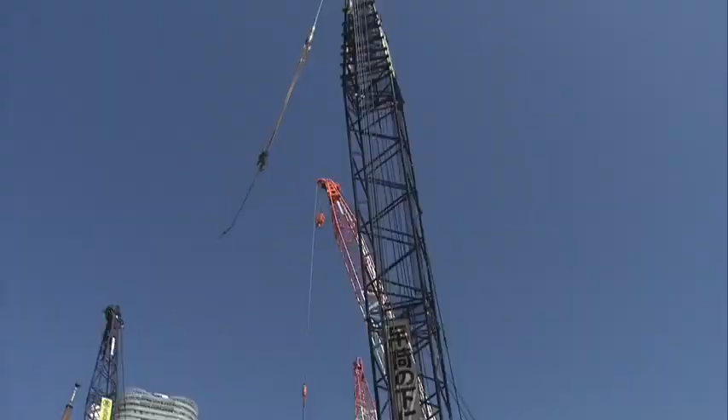In 2020, the Olympic and Paralympic Games will be held in Japan's capital, Tokyo. Ahead of the Olympics, major urban restructuring is underway. It aims to reinforce aging infrastructure built from the latter half of the 1950s, during Japan's period of rapid economic growth, and to enhance Tokyo's new role as an international city.

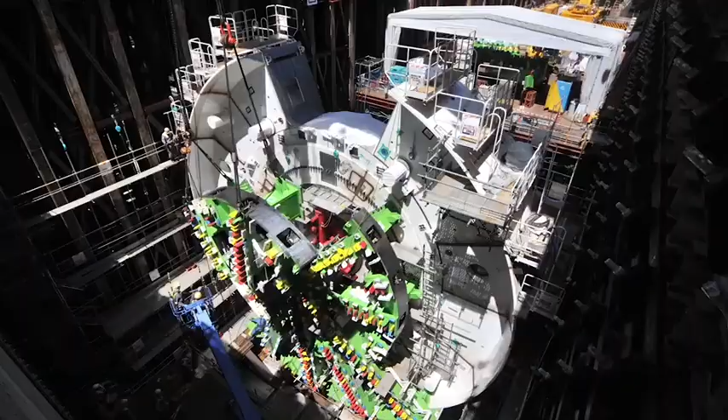This large-scale infrastructure construction work is being sustained by state-of-the-art artificial intelligence and information technology. In this program, we are at the front lines with major Japanese construction company SHIMIZU Corporation as it endeavors to redevelop Tokyo. Explore with us cutting-edge technology in the fields of construction and public works.

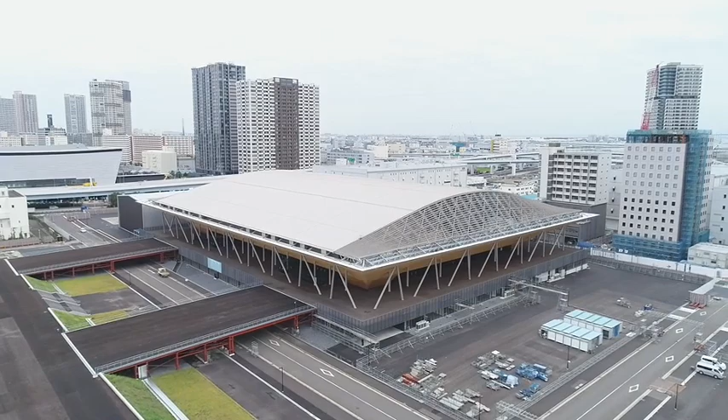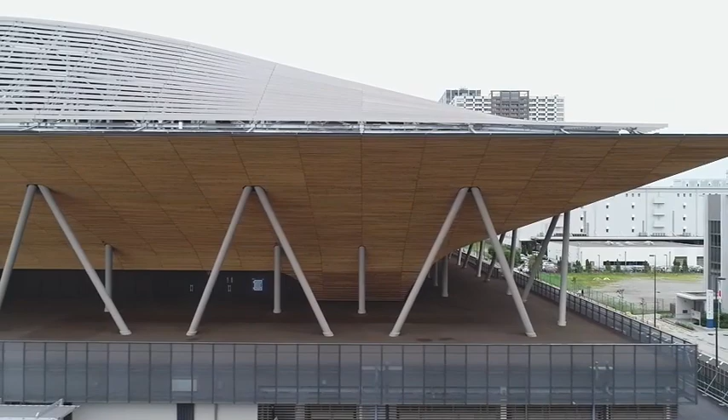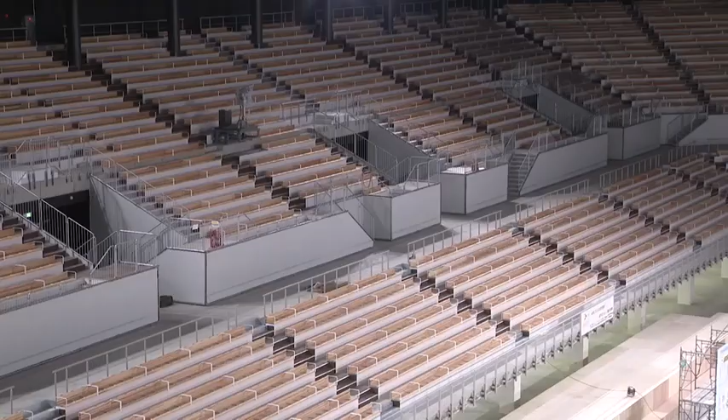Newly constructed on Tokyo Bay for the Tokyo Olympics and Paralympics is the Ariake Gymnastics Center. With a length of 140 meters, a width of 120 meters, and a height of 30 meters, this building will hold 12,000 spectators. It will be the venue for Olympic gymnastics, rhythmic gymnastics, and trampolining, and for Paralympic boccia. After the Games, the seats will be removed to use the center as an exhibition hall.

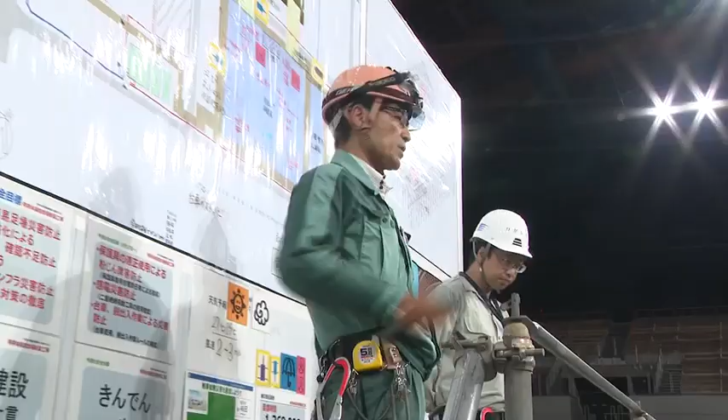Hi, おはようございます。9月19日木曜日、朝礼を行います。 This is Masamichi Nagata, the construction manager of the Ariake Gymnastics Center. Soon, he will have to hand over the building. There is just over a month until its completion. Work has entered the final stages. Nagata carefully checks on the progress being made. He makes a point of speaking directly with the workers.

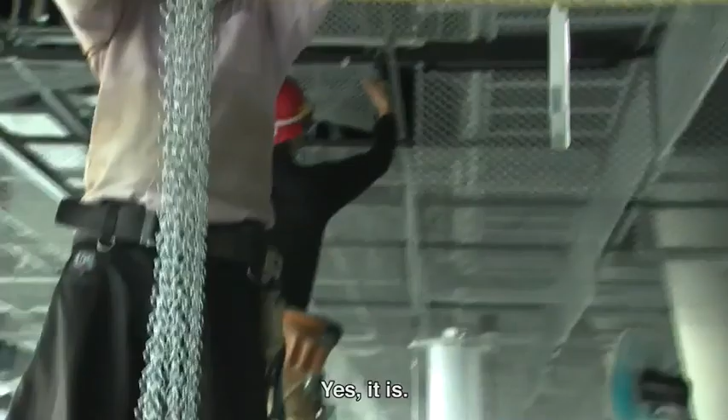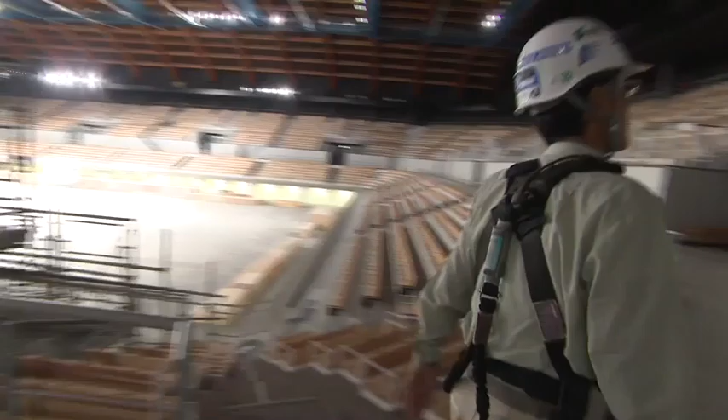The biggest feature of the building is the abundant use of wood for the roof and the seats, evoking a sense of tranquility and healing, and creating an image of the venue as a vessel of wood. Wood is also used in the outer walls that jut out diagonally, above the passageways that encircle the venue. Wood scraps are even used in the passageway paving. The aim is to make the athletes and spectators visiting from around the world feel comfortable.

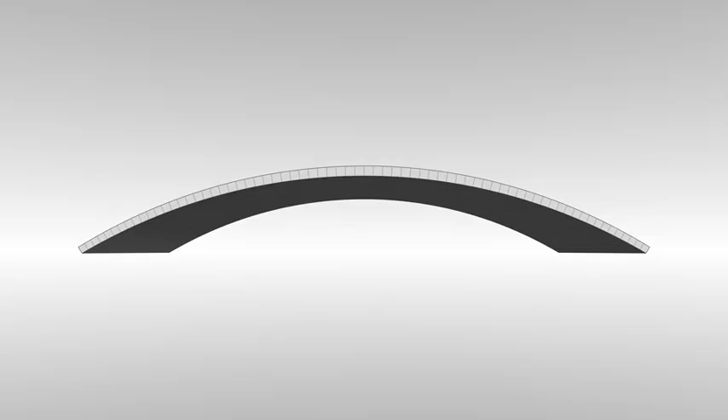The greatest challenge for SHIMIZU Corporation has been how to construct the arch-shaped timber beams that support the roof. Although these beams are 90 meters long, they aren't made of steel usually used for long-span structures. They had to work out how to attach it. With an arch shape, its weight pushes it outward, making it unstable. And in this case, the span is a colossal 90 meters.

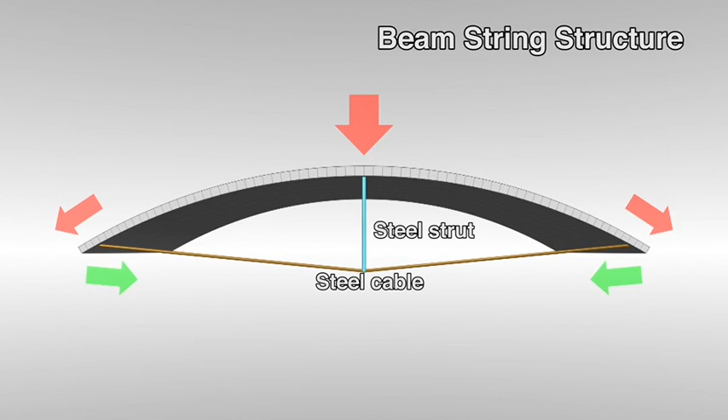SHIMIZU decided to adopt a beam string structure. Steel cables were drawn beneath the timber beams, and steel struts were placed between the beams and the cables. In this way, like the mechanism of a bow and arrow, the steel struts cause the arch to push upward. This balances the force of the beams, struts, and cables, which creates stability.

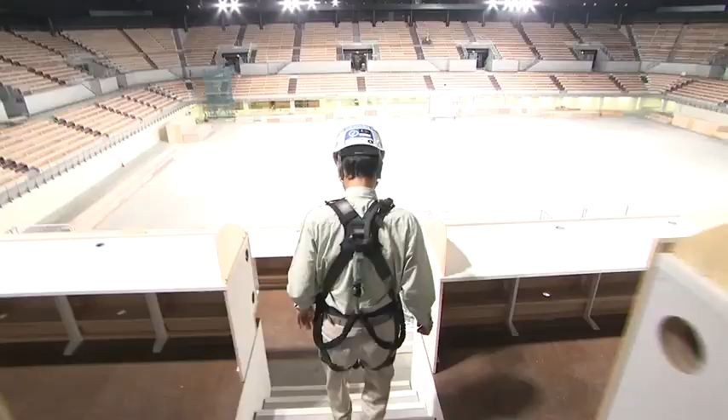How to construct a space as big as this that's supported by timber, something that is rarely seen worldwide, and how to do that in a construction period of just 2 years. With a scale like this, it generally takes 2.5 years. To get it done in 2 years requires quite a bit of ingenuity. We considered many methods.

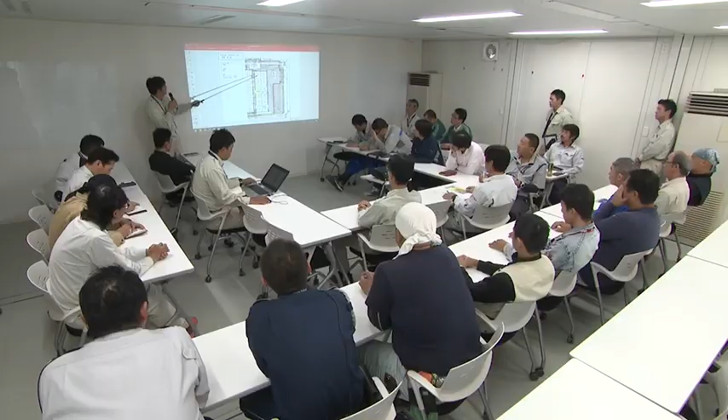Nagata has experience building baseball stadiums and exhibition halls, so he had no hesitation working on a large building. But based on his experience, it would take 2.5 years. When SHIMIZU accepted the job, there were only 2 years left. He would have to cut construction time by 6 months. He fundamentally re-evaluated the construction process.

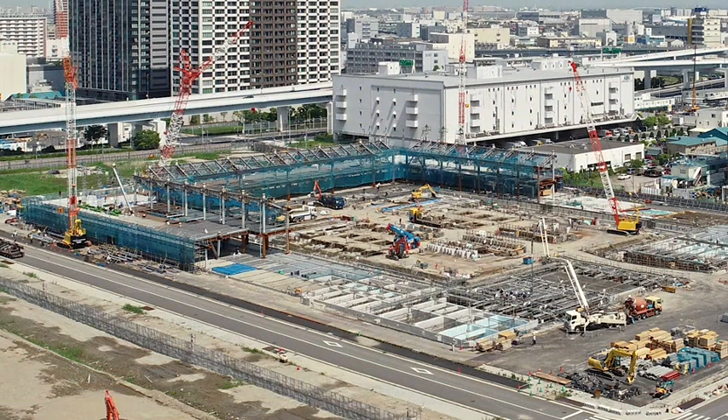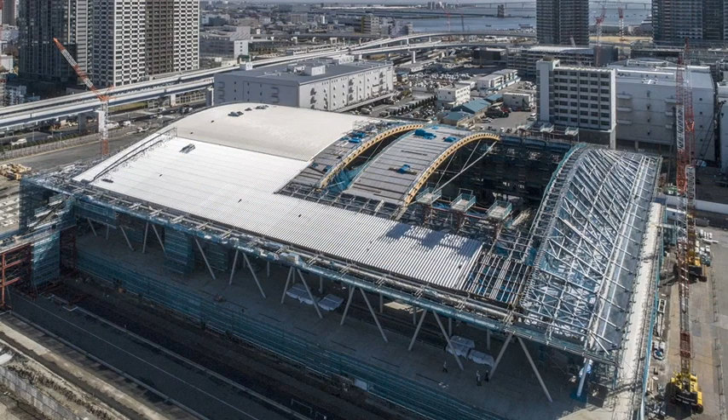Usually, buildings are constructed from the bottom up. But here, after first completing the floor, they decided to build from the side. If the stadium were cut vertically, you would see a similar structure repeated. Based on that, they decided to start work from the rear and gradually move forward.

With such a big space, if we set up scaffolding for all of it, it would be a huge amount. By building from the back, we can move the scaffolding and the workers can complete one cycle. Because that cycle is repeated, efficiency steadily increased, and in the end, work was done almost twice as fast. We were able to do it in half the number of days.

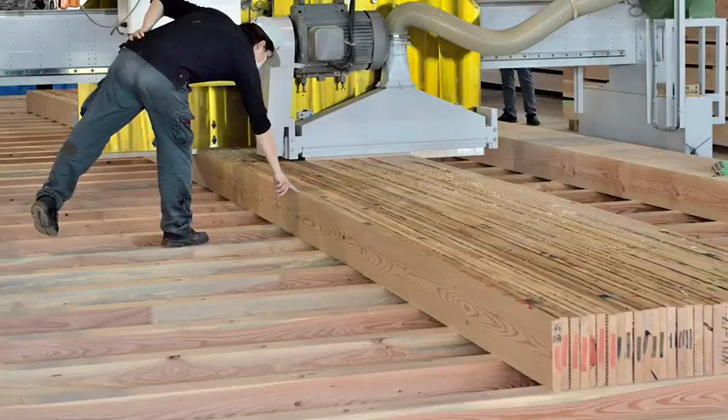The beams are factory-made, using domestic larch trees, and are brought to the site where they are put together. By proceeding in order from the rear, the roof could be separated into 5 units and attached in order.

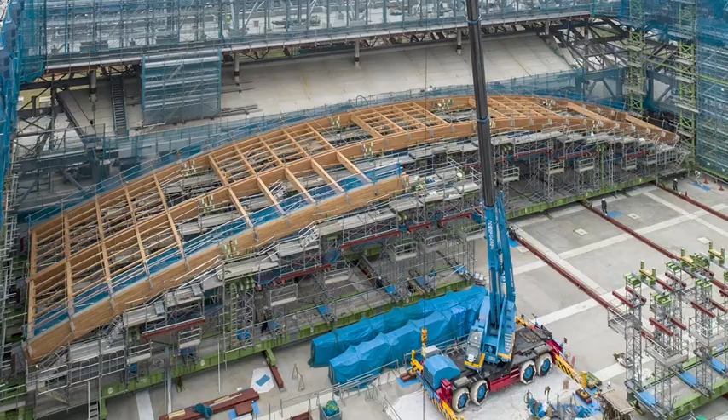We placed the frame for the unit on the ground floor playing area first, and then we assembled the roof unit on that frame using a crane. This procedure took a lot of time at first, double the amount of time I had estimated. Assembly of the roof units. How to reduce the amount of time needed to do this subsequently became an issue.

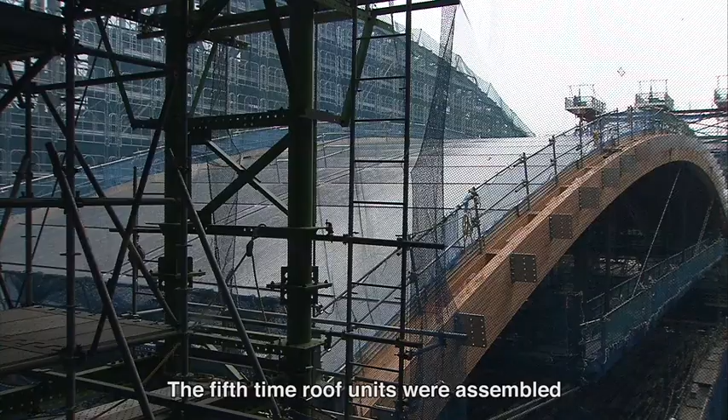Each roof unit is 70 meters long, 14 meters wide, and weighs 200 tons. The floor is already complete. Consequently, a heavy, large-size crane cannot be brought in. So, they use hydraulic jacks to lift them to a height of 30 meters. Slowly, carefully, they raise them.

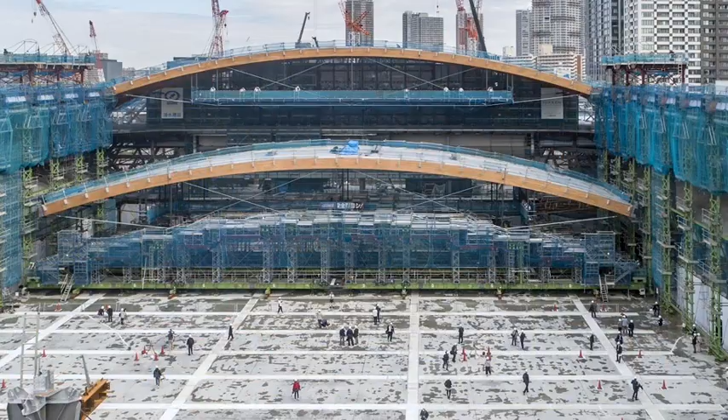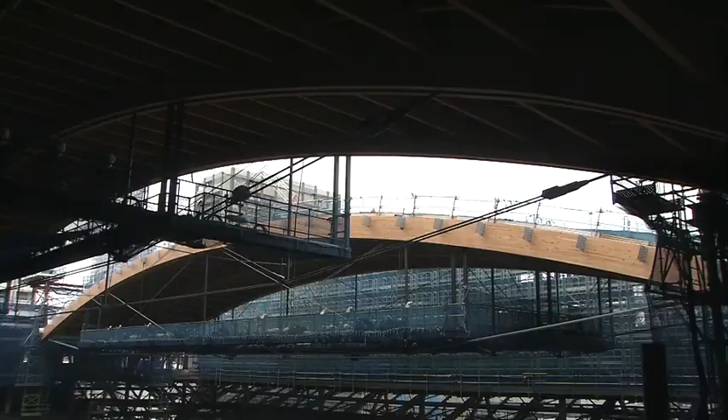Because the raising of the roof was divided into 5 lifts, lessons learned from the first lift were applied to the second lift, and then applied again from the second to the third, and so on, which rapidly increased the speed of the work. In the end, it took 1 month to assemble at ground level. The workers' experience also made a big difference to the lifting process, which we completed in half a day.

At first, they worried that processing accuracy with timber would not be as good as with steel. The accuracy with the timber was amazingly good. There was not even a deviation of 1 or 2 millimeters. The total length of this beam string can be adjusted by pulling the cable. In order to fit the beam between the frames on each side, the overall length must be adjusted.

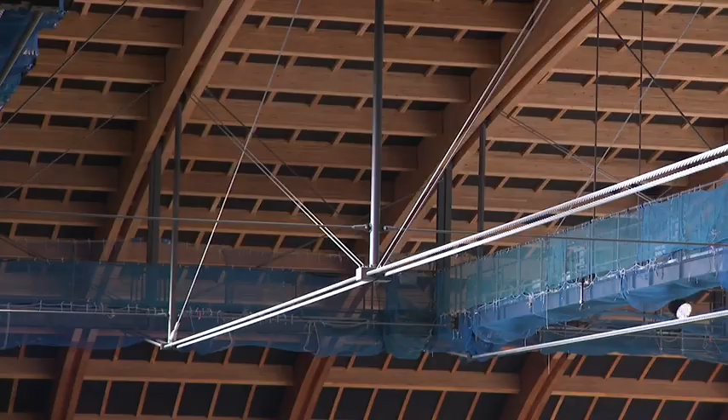But by adopting the beam string structure, we could construct the roof accurately with timber. Really, as calculated, we proceeded with the timber without any measurement error, and conversely, I thought that it is a more precise structure. The stadium is filled with the knowledge and ingenuity of all concerned. This wooden masterpiece will be ready for its Olympic performance in July this year.

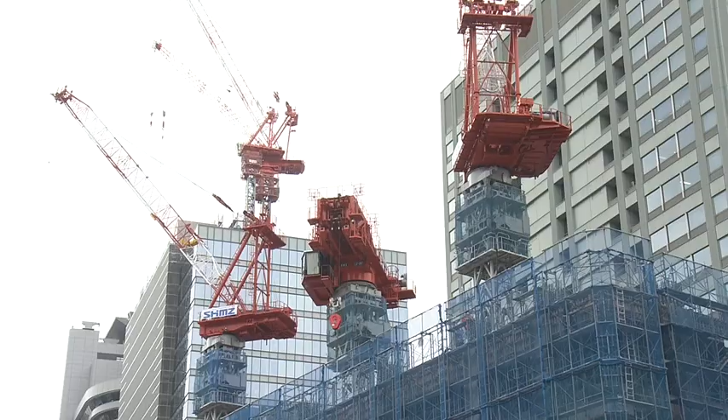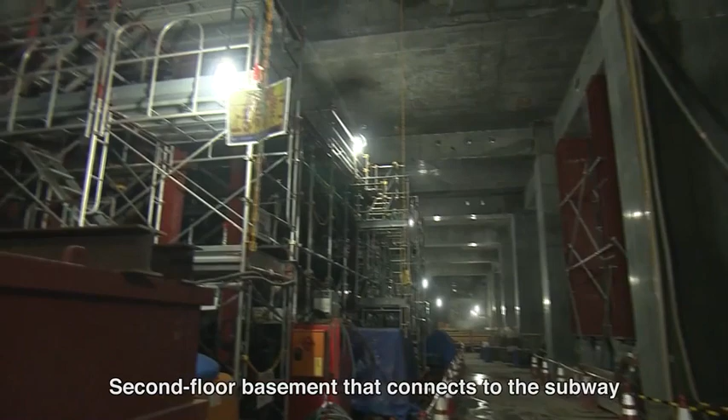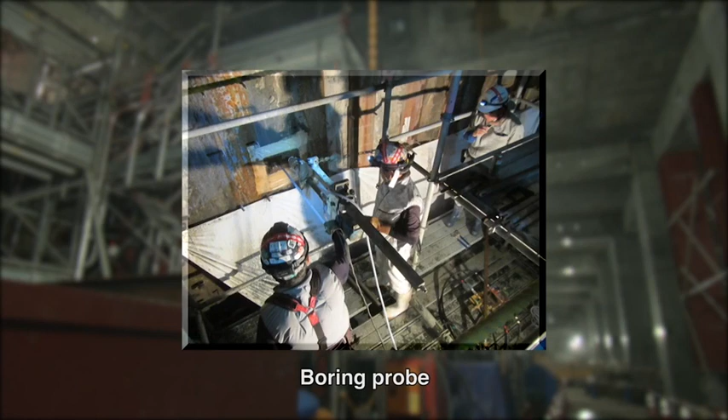Urban redevelopment is happening all over Tokyo. Huge skyscrapers and other structures are being built where old buildings and houses used to be. This is the construction site of a 40-floor skyscraper with 2 basement floors. The framework of the 5th floor section is currently being built. In the city center, built more than a century ago, the subway has been used for many things, and there is a possibility that unrecorded buried objects have been left behind. Consequently, an advanced geological survey was carried out via boring to check whether any impediments to construction might occur.

There were also other issues with this site. This is a large-scale building, and compared with the site, there is almost no spare space. In these cases, the most difficult part is bringing in materials and putting the building together. Since there is no place to put the materials, we are renting land at a different location and temporarily assembling it there, bringing it to the site, and installing it. I think this site is unique to the city center.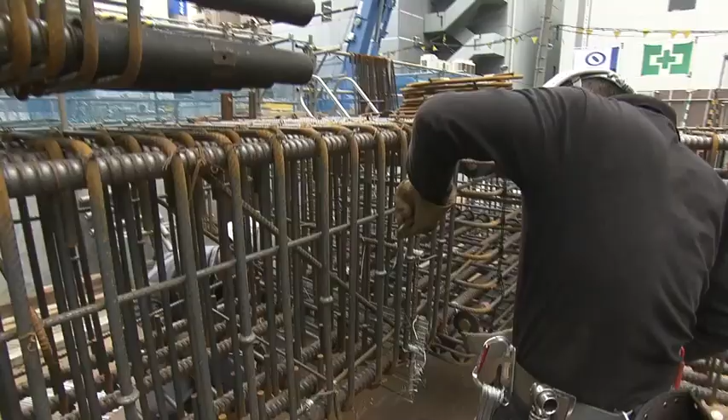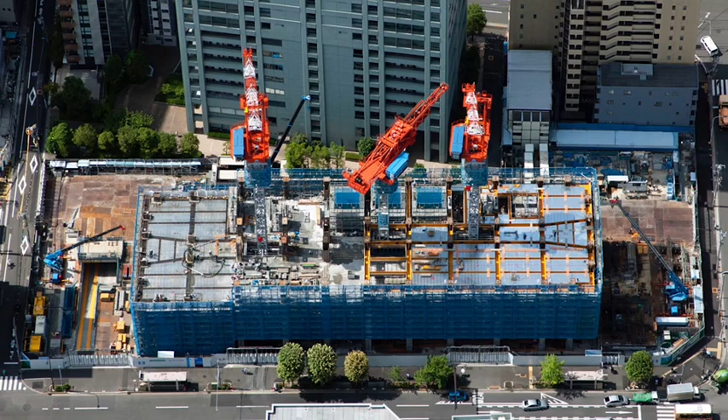A crane is needed to lift the assembled materials to the work site. Currently, 3 cranes are being used. If conventional tower cranes were used here, there would be an increased chance of the booms colliding. So, SHIMIZU Corporation developed and introduced a new crane. It is the world's first horizontal sliding crane. By expanding and contracting the boom in a horizontal direction, the work radius can be adjusted from 3 meters up to 25 meters.

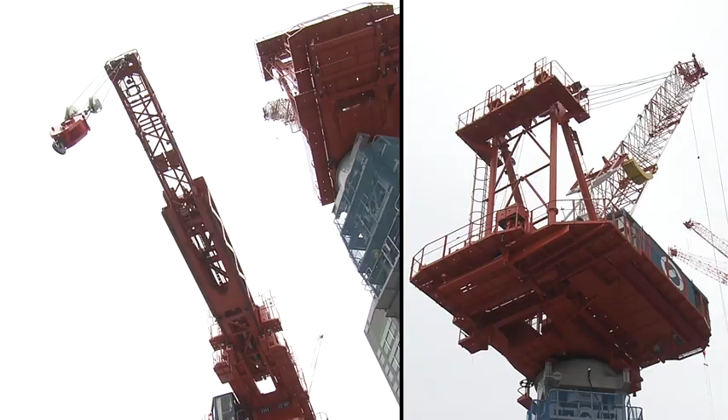One horizontal sliding crane is being used at this site. It is mainly being used to hoist construction materials and has greatly improved work efficiency. A horizontal sliding crane's maximum load is 12 tons. Compared with a conventional crane, since the highest point of the boom is lower, it works well in areas where aviation restrictions apply.

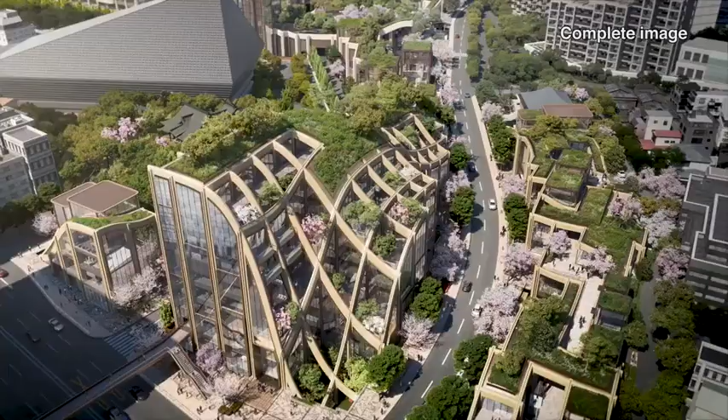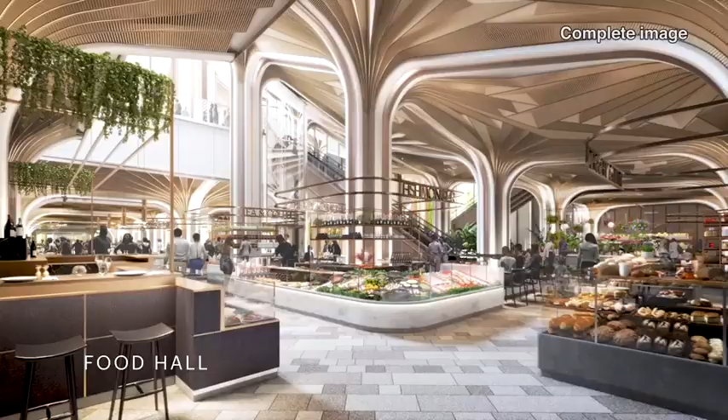On an 8.1-hectare site in Tokyo city center, a grand project to build Japan's tallest skyscraper, 330 meters tall, has begun. Work started in August 2019. Completion is scheduled for March 2023. This redevelopment project, featuring a building of 64 floors above ground at its center, is the work of major Japanese real estate developer Mori Building. After completion, 3,500 people will live here. 20,000 people will work here, and between 25 and 30 million visitors are expected each year.

Since competition between global cities is intensifying, the question of how to attract people, materials, money, and information will be very important. The Toranomon Azabudai project will be a multifunctional, compact city with international-grade offices, housing, a hotel, and even an international school, creating a new cultural and economic center that will draw active people to Tokyo from all over the world.

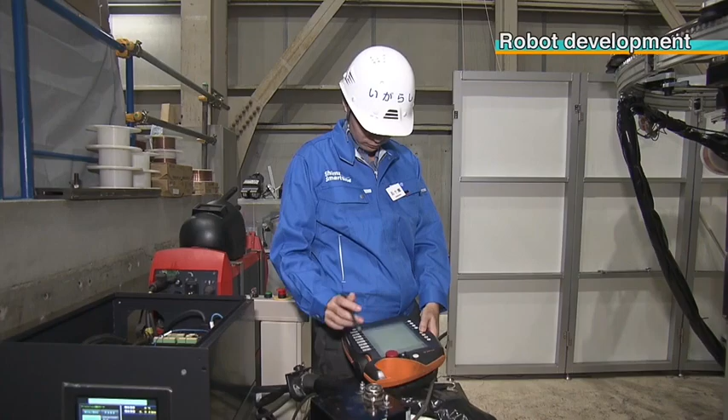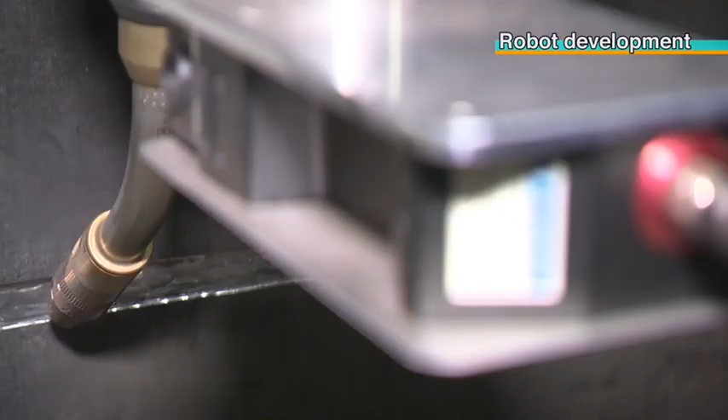SHIMIZU Corporation is developing various robots and pursuing labor-saving initiatives. This robot welds a steel column. Using a laser, it measures the shape of the groove and where to weld, and precisely covers it with welding material. The robot arm has 6 axes, so it moves freely as it welds.

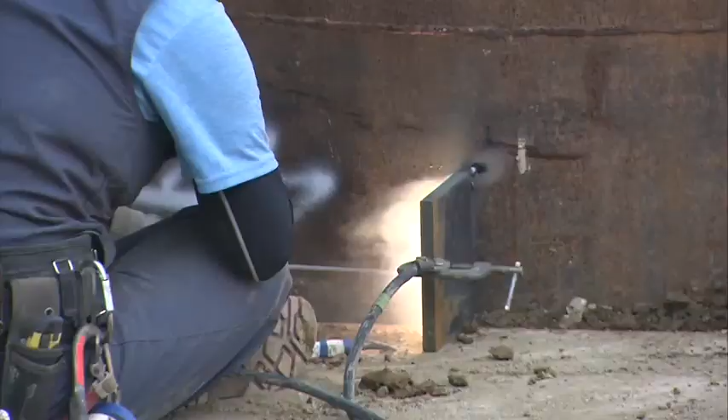Right now, in Japan, the lack of skilled construction site laborers is a serious problem. At its peak, the construction of a skyscraper requires more than 2,000 workers. Securing skilled laborers on site is a huge concern. We see building on this scale, including securing labor, as an enormous job. Amid a shortage of labor, those of us on site plan to utilize welding robots, unmanned transport systems, and various other methods.

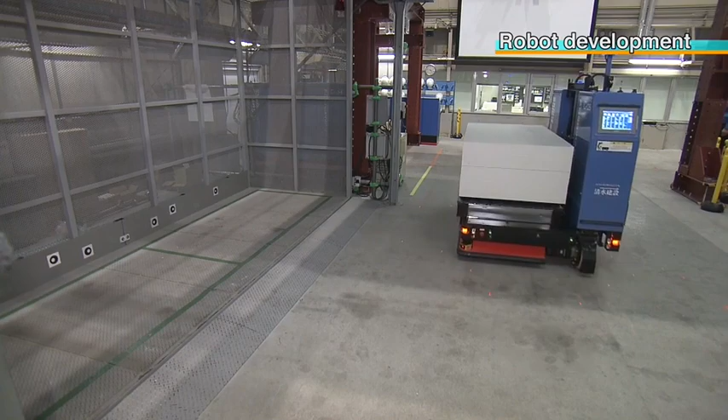This is a transport robot. Once the material is selected and the destination is entered into a tablet, the robot will take it there. If it encounters an obstacle, it stops and waits. If it does not move for a fixed time, it recalculates the route, goes around the obstacle, and continues on. It significantly boosts labor saving on site.

Robots that install ceiling and floor materials are also being developed. They use image sensors and laser sensors to confirm where to place the screws. They screw the materials in the precise spots. The Toranomon Azabudai project plans to use state-of-the-art robots like these at its worksite to boost labor efficiency.

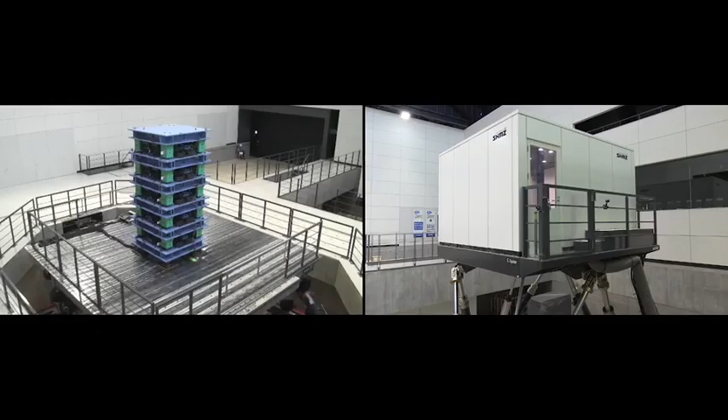In earthquake-prone Japan, earthquake countermeasures are essential. SHIMIZU Corporation has developed a high-performance shaking table that can reproduce the shaking of past earthquakes from around the world. This experiment uses a large-scale shaking table to reproduce the vibration of a skyscraper. The ground and the building shake in a fixed rhythm. This is called a cycle. When these cycles overlap, resonance occurs and the building sways greatly. The cycle that overlaps with high-rise buildings is long-cycle seismic motion. New measures have been devised to counter this.

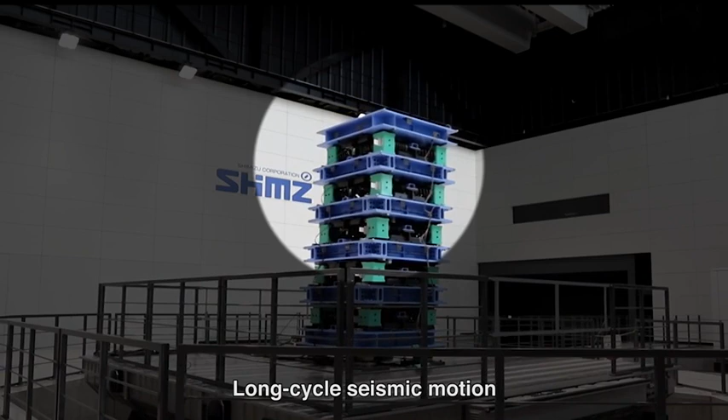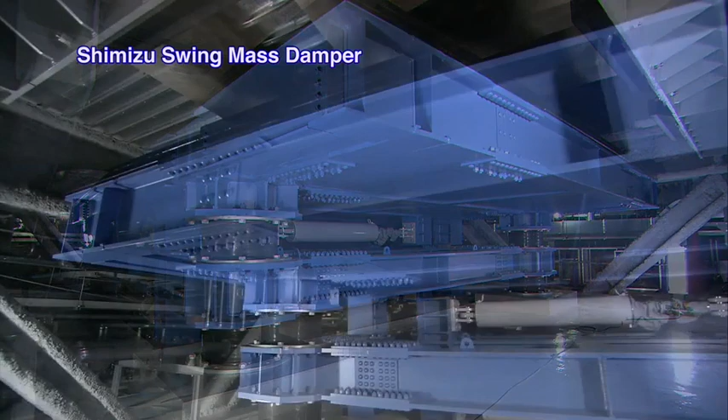This 38-story skyscraper, with another 3 basement floors, is Tokyo World Gate's Kamiyacho Trust Tower. This building has level surfaces, but because it is rectangular, cycles differ on its short and long sides, producing complex vibrations. To counter this, the building uses a new vibration suppression device, the SHIMIZU Swing Mass Damper. Just one of these devices can absorb the vibrations of 2 different cycles. This is the first such damper in the world.

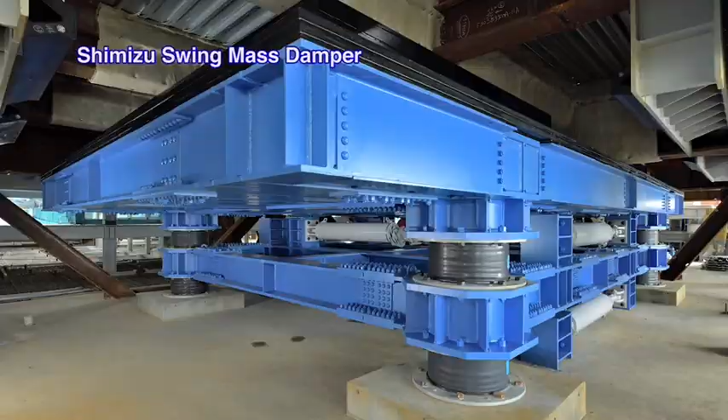This SHIMIZU Swing Mass Damper is composed of a 380-ton, 12-meter long, 7-meter wide, and 1-meter thick steel weight, which is on top of the device. 4 legs that are each made of 2 shock-absorbing isolators that are 60 centimeters in diameter and 36 centimeters high. 8 oil dampers. And 2 dynamic screws. The key to creating this groundbreaking vibration suppression device is the dynamic screw. With it, the cycles of the vibration suppression device can be adjusted and the cycles matched to both directions of the building.

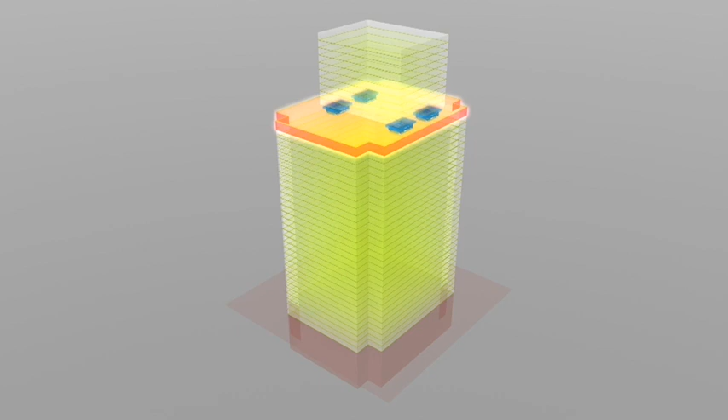4 of the devices have been installed in the space between the 30th and 31st floors of Kamiyacho Trust Tower. During an earthquake, they absorb a maximum of 15% of vibrations, and during strong wind, 25%.

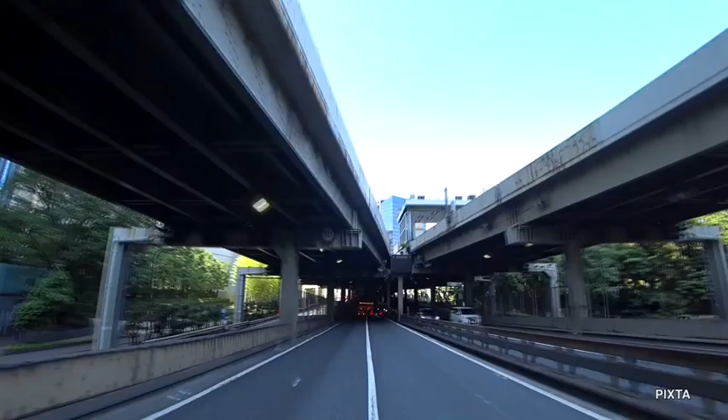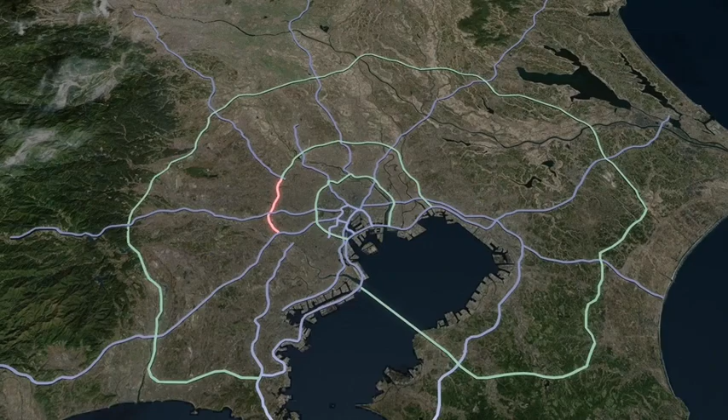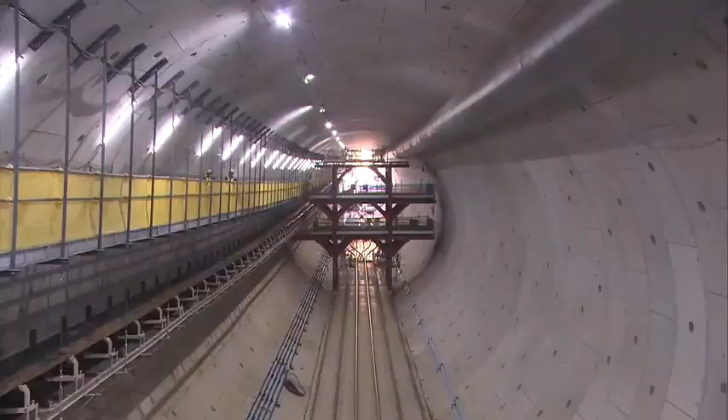The backbone of Tokyo's transportation network is its expressways. New roads are being constructed to improve the city's functions. This is the Tokyo Outer Ring Road, which will connect 3 existing major expressways, the Kan-Etsu, the Chuo, and the Tomei. The 16-kilometer section from the Oizumi Junction to the Tomei Junction will be joined by a tunnel. It is difficult to construct a new above-ground freeway in the Tokyo area, which is densely packed with buildings and homes. This tunnel's diameter is 15.8 meters. It will become a one-way road with 3 lanes.

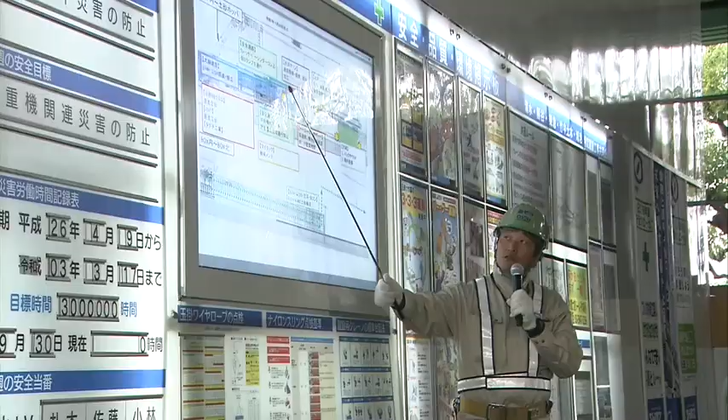Construction here will use an excavator called the shield machine and the shield construction method. The machine's diameter is 15.8 meters. It is the largest in Japan. SHIMIZU Corporation is in charge of tunnel construction for a section that runs for about 7 kilometers from Oizumi Junction. The manager of the site is Tadashi Hara. Other construction he has previously managed includes a subway in the city center.

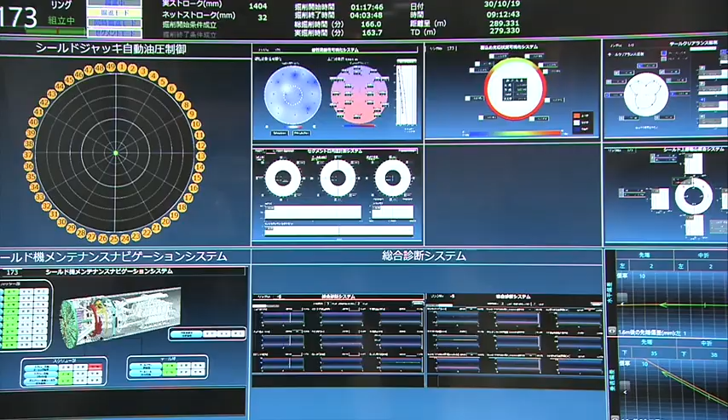The greatest feature is that the tunnel's cross-section is big. It is Japan's largest long-distance cross-section, so that makes it a tunnel with a high degree of difficulty. This work is a compilation of the shield construction method developed in Japan. This operation room controls the shield machine. On the front section of the shield machine, the cutter head has teeth 10 to 25 centimeters long set in a radial shape. By turning it, digging proceeds as the soil is shaved away.

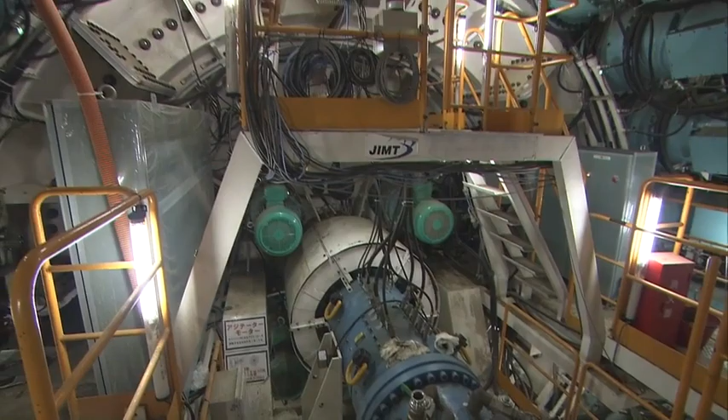This is the back of the cutter head. After excavating, a shield jack is pushed into the tunnel wall. When the jack is extended, the shield machine advances.

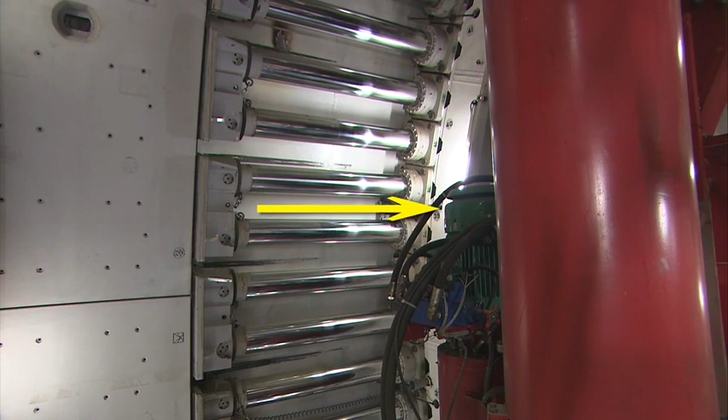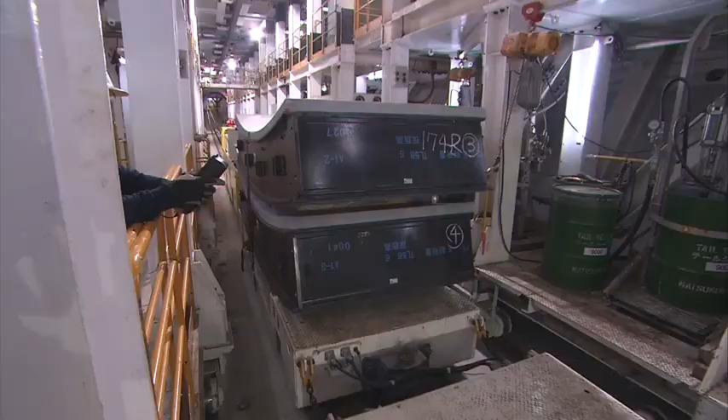In the space that opens up after the shield machine moves forward, panels that are called segments are assembled in a ring shape to make the tunnel wall. 13 segments make one ring. The segments are carried by a self-propelled cart and are sequentially attached to the wall face.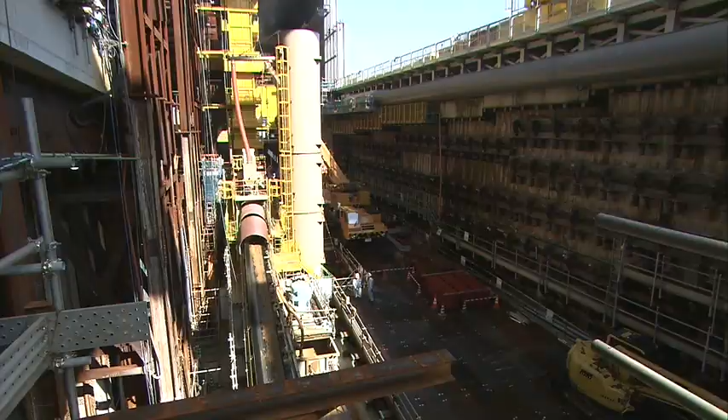This is probably the first time in the world that a conveyor belt has been set up on an expressway. This site is narrow. If we were to use a dump truck to take the soil away, we would need one every 15 seconds, which would make the work difficult. So we are following our plan to place a conveyor belt on the expressway.

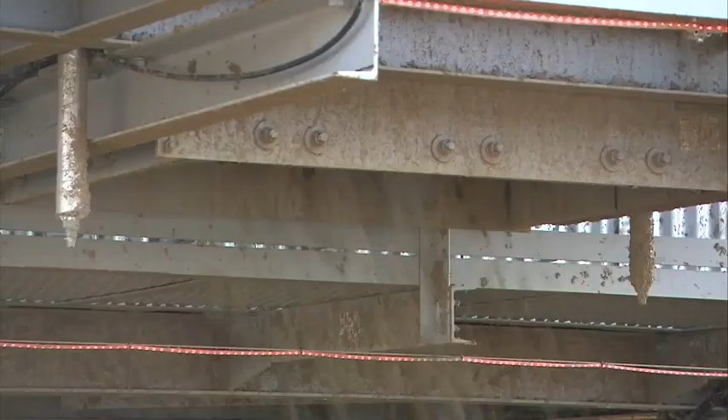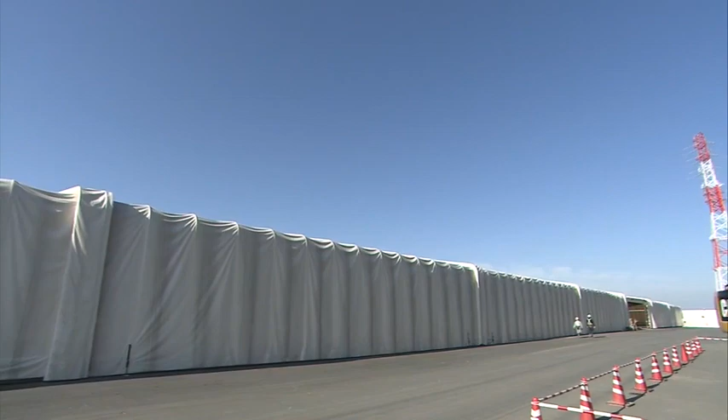This construction work at Oizumi Junction will excavate a total of 2.9 million cubic meters of soil. That's equivalent to about 500,000 10-ton dump truck loads. But using the conveyor belt makes trucks unnecessary, and that helps reduce carbon dioxide. The stored soil will be used in public works projects, such as for other road or river works.

In order to improve the distribution capabilities of the capital, Tokyo, SHIMIZU Corporation constructed S.LOGI Niiza, a large-scale distribution facility with a total floor space of 130,000 square meters. The solar power panels spread across the roof generate 2,000 kilowatts of electricity. If a power failure were to occur, they can supply electricity to the facility.

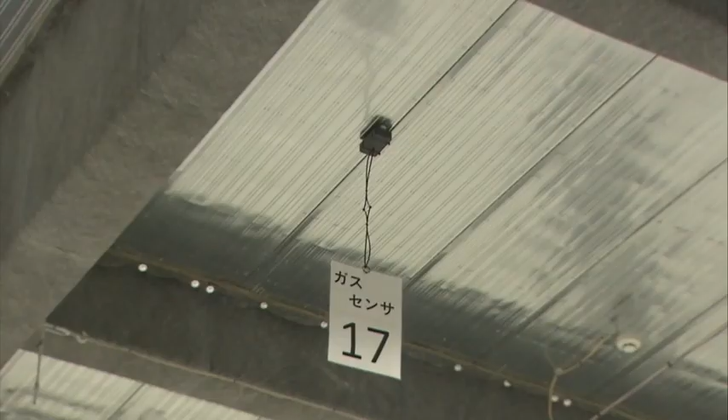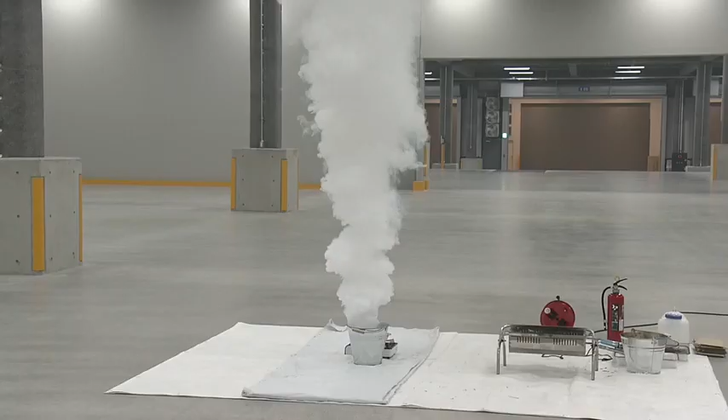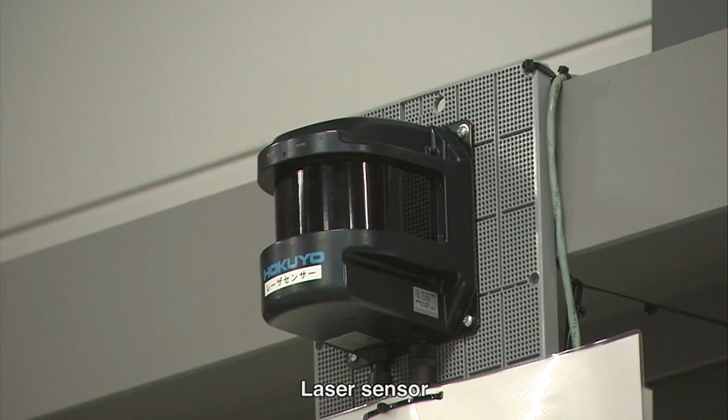SHIMIZU Corporation therefore looked at the cardboard and vinyl used as packing material. It developed a special sensing system that promptly detects the chemical substances that these materials release when burned. It is also equipped with a laser sensor that detects smoke, and artificial intelligence comprehensively analyzes various information. With high precision, the system is ready to quickly detect fires and report them.

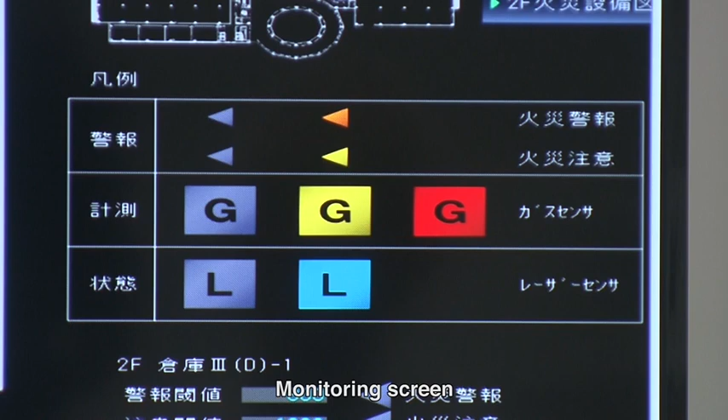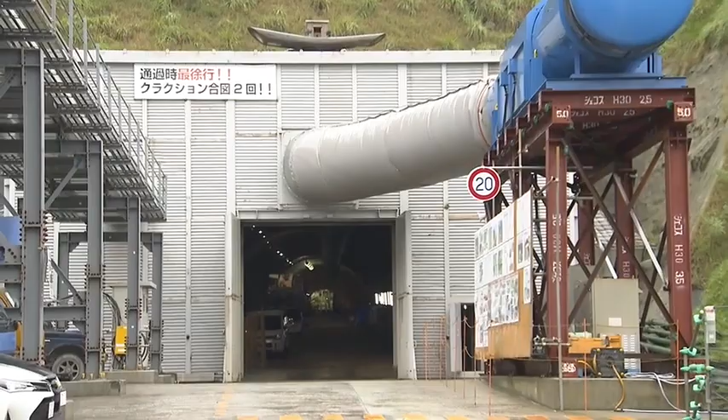It takes less than 10 minutes for a fire to be detected after cinders are created. That's about the size of a fire that can be extinguished by buckets of water. It is also developing a system that uses AI technology to improve the safety of construction work. This is a site where explosives are used to excavate a tunnel.

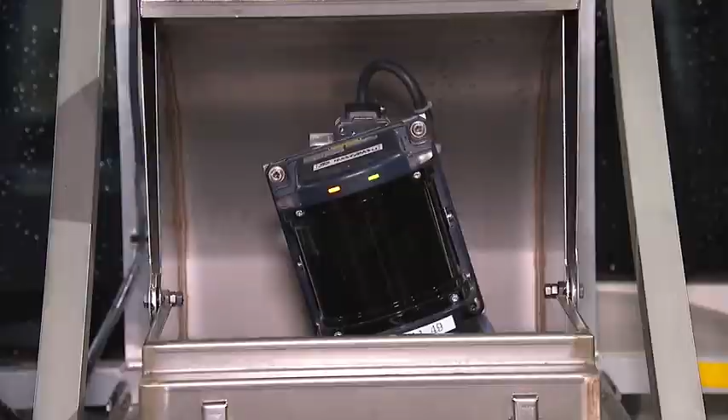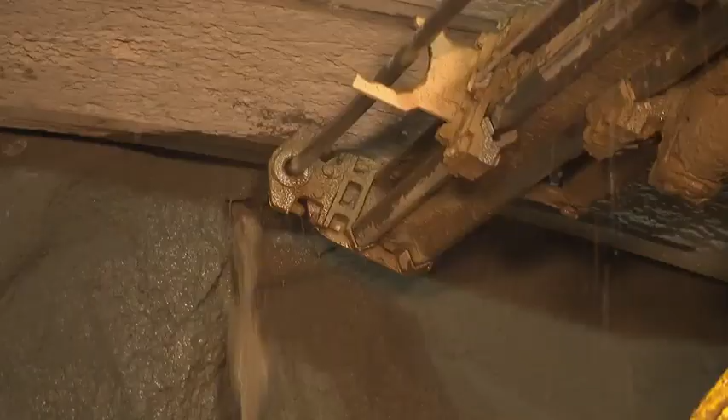This is an in-vehicle style 3D scanner. It scans the tunnel's excavation face and analyzes in detail the data of the shape of the excavation surface. It automatically calculates the most effective and safest location for an explosive charge. This data is transmitted to the excavation machine and, based on the data, the sections where explosives are set are accurately excavated. The data related to excavation is all stored, and AI technology is utilized in subsequent work.

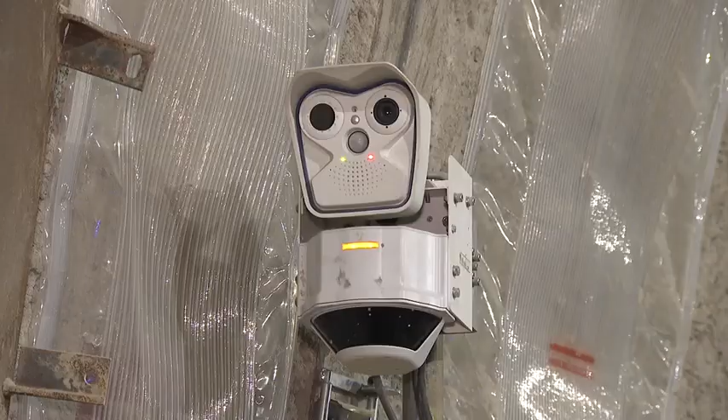At this site, an AI camera and other equipment that monitor the movements of heavy machinery and people are also set up. They carry out analysis to improve work safety and will utilize that in subsequent work. With the renewal and rebirth of the city, it will become an inclusive city, comfortable for everyone to live in and thrive in, not only for Japanese citizens, but also for foreign business people and those living here. In this way, Tokyo's international competitive power will improve, and that will also lead to great development economically.

We in the construction industry do that work reliably, and we feel deeply that fulfilling that duty is a great honor. It is a heavy responsibility, but I believe it is our mission. Japan's capital, Tokyo, is trying to accomplish a huge transformation as an international city. Underpinning this rebirth of Tokyo is a base of extensive experience and know-how, greatly supported by remarkable progress in construction and public works technology that is making the most of leading-edge AI and IT.